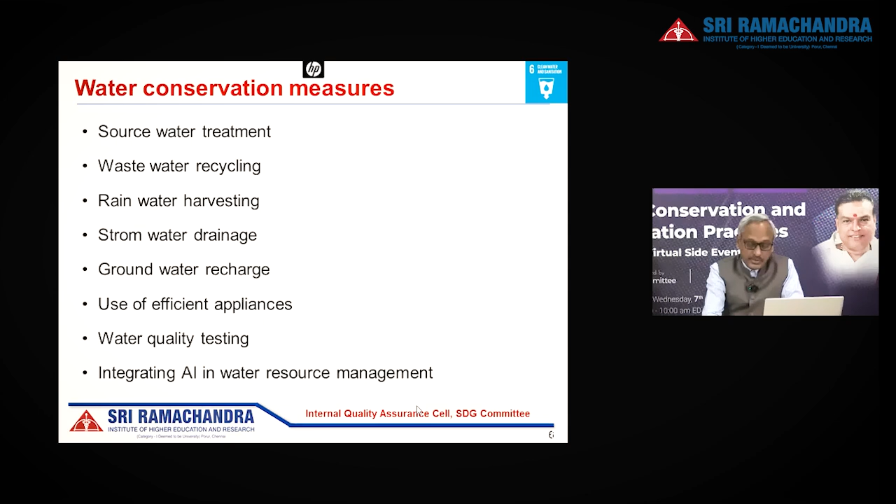On a given day, we are extracting 1,900 kiloliters per day of fresh water, but that's not the requirement of SRIHER. Our requirement is 4,300 kiloliters per day, which means that we are recycling around 45 to 50% of the water and using it back into the system. That's a very unique aspect.

So where is the water used? For domestic purposes, laboratory operations, toilet flushing, swimming pool, laundry, the HVAC system, and gardening. Every outlet is connected to a combined effluent treatment plant.

And the excess treated water is stored in the artificial pond. I want to mention here that...

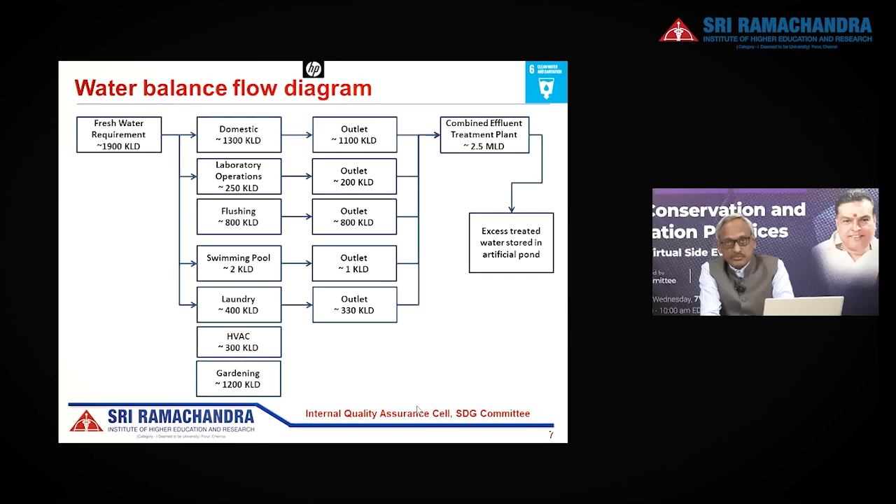With the different requirements of water treatment, we have obtained permission for having a combined effluent treatment plant. Normally you would need a separate sewage treatment plant and effluent treatment plant, but we at SRIHER have obtained permissions from the Tamil Nadu State Pollution Control Board to have a combined effluent treatment plant. So how do we treat the source water?

We take bore water, around 1,900 kiloliters, which first goes into a collection tank, and then we add specific chemicals to remove the iron. We have a specific challenge in our campus - the only problem we face is with iron - so we have an iron removal plant exclusively, followed by the iron removal system.

This water is then taken to the sand multi-graded filter, multi-graded stone and sand filters, and finally goes to the activated carbon adsorption system, followed by disinfection with 5% sodium hypochlorite. After that, it goes to the storage tank.

From there, it goes to the utility - around 1,290 kiloliters are taken for utility purposes. From that underground tank, a part goes to the softener plant, and a part goes to the laundry and dental colleges, and also to the sterile stores department.

We have an additional filtration system for various uses. After the utility, it goes to the RO plant stage 1, and the output of stage 1 goes for drinking, while the reject water is recirculated back to the utility purposes.

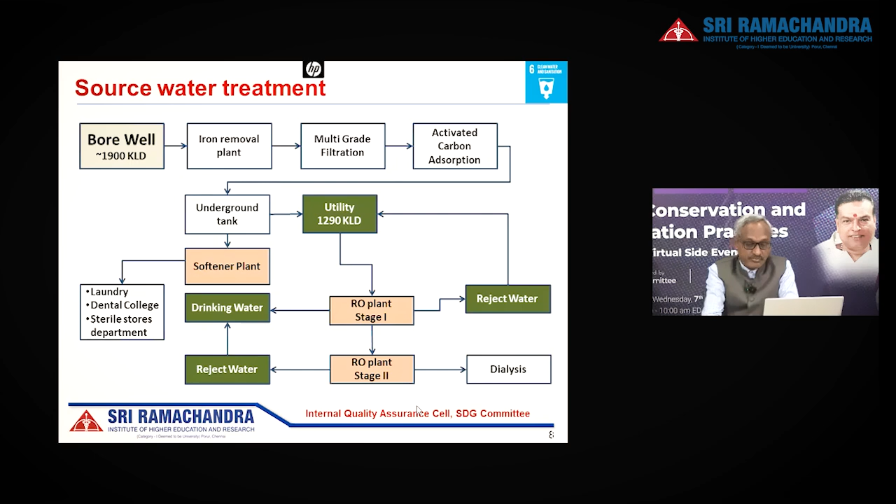This is the flow diagram showing how the water treatment plant operates in our campus. I'm not sure if you can see the raw water pump, which pumps out water from the bore well, into a collection tank.

On the right-hand side, there is an iron removal plant where we add polyionic chemicals and give aeration to convert the iron from the dissolved to the suspended state, so it can be flocculated and removed. This simple process has been done very efficiently for decades. Following iron removal from the clarifier system, it goes to the sand filter bed, then activated carbon, then UV treatment, and from there back to the RO system.

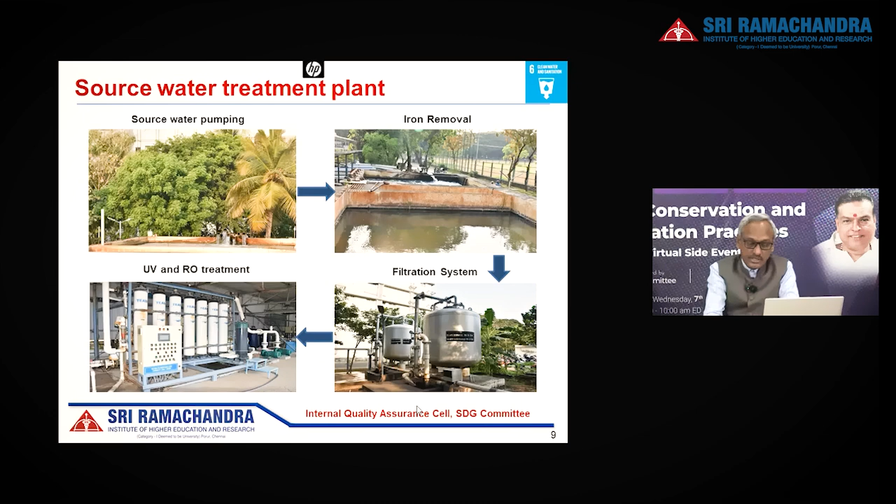We have 3 levels of aeration tank where the water is aerated, with biological oxidation by bacteria. After the aeration process, it goes to the clarifier where all the organic matters settle down and are collected. The sludges are collected and removed, and then the clear water goes to the sand filter bed and activated carbon filters.

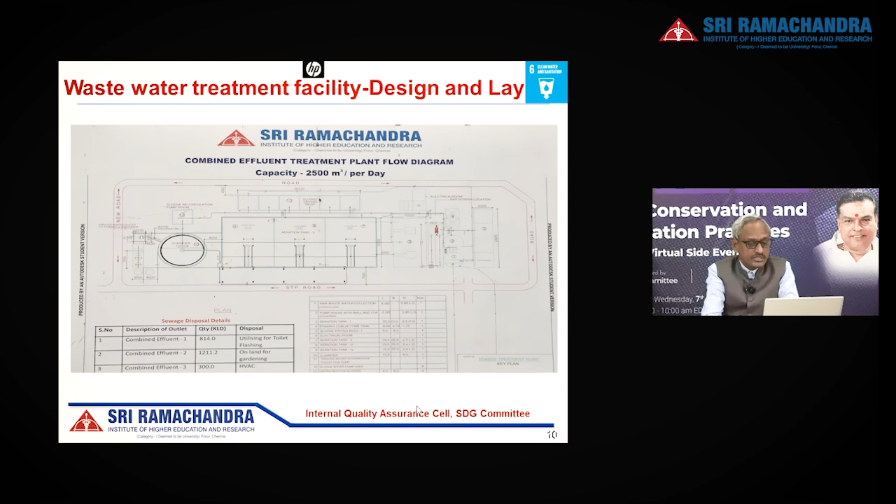Let me show some pictures of the plant operating in the campus. From the left-hand side is the collection tank, and moving right, it goes to primary aeration, secondary aeration, and tertiary aeration, then to the clarifier tank, the filtration system, UV treatment, and the softener plant.

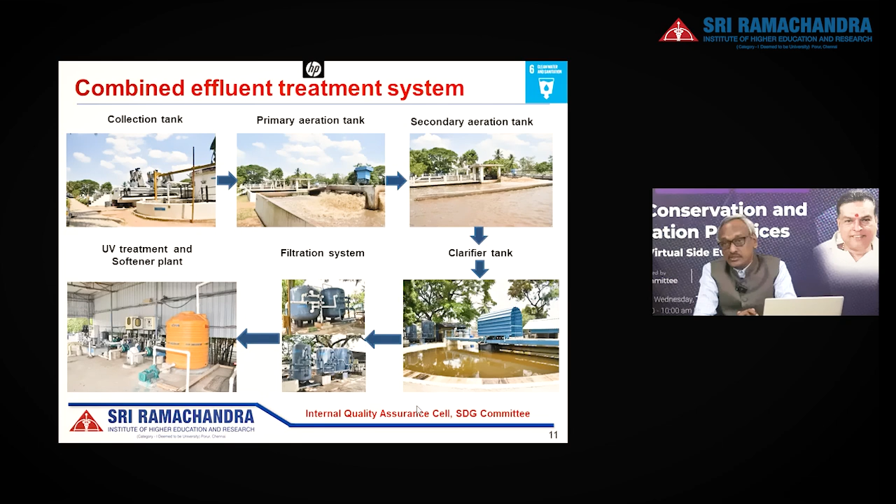So what happens after we treat this water? It's very unique - after storing it in the underground tank, it goes through UV treatment, and then to the next level where it is stored and taken for toilet flushing. Around 820 kiloliters per day is recycled back for toilet flushing.

Next stage is going for ultrafiltration. Why do we need ultrafiltration? Because, along with the softener plant, we use that water for the HVAC cooling water system, like heating, ventilation, and air conditioning. So uniquely, we cool the water and take the cool air to circulate in the air conditioning system.

This is another energy efficiency system we have been following in the campus for years. Additionally, condensate water coming out of the HVAC system, around 5,000 liters per day, we are expanding the system to other buildings. Currently, this condensate water is used for dishwashing purposes. It's another place where we don't want to waste water.

After the effluent is treated, the water goes directly into the artificial pond. This is a very unique artificial pond, 500 meters length, 70 meters width, and 3.5 meters depth. It has a very high holding capacity, and therefore for gardening, water is pumped from this artificial pond. Again, I want to reinstate that we are a zero discharge campus. Anywhere in the flow chart, whatever waste comes out of any process, we reuse and recycle it back into the process.

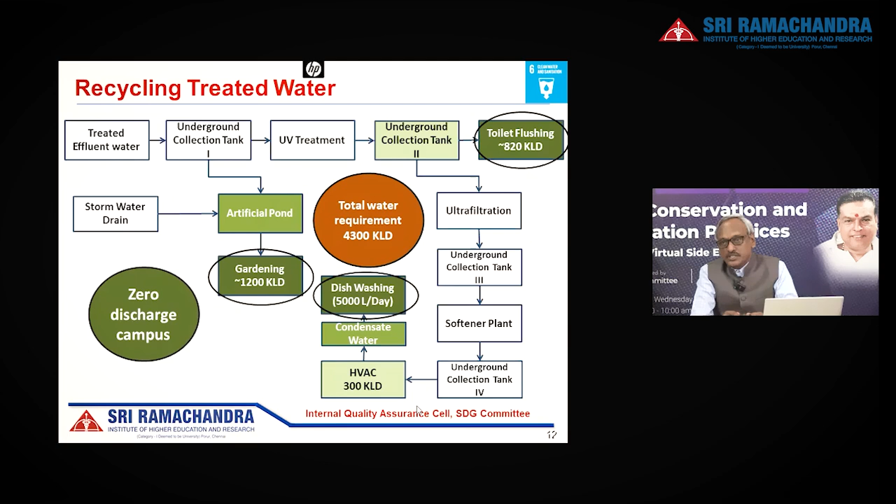So if you look at this, we are saving around 45 to 50% of the water by using the recycled water.

Rainwater harvesting: we have a good rainwater harvesting system spread over 150 acres of land. First, we have rooftop area. What do we do with it? We have around 100,000 square meters of rooftop area across our campus, from constituent colleges to hostels, hospitals, and residential buildings. So around 8,100 cubic meter harvesting capacity has been established from the rooftop area.

We have 9 open wells with a 2,145 cubic meter capacity, so we can harvest water there as well. We also have harvesting pits, 36 in number. We follow specific guidelines and standards for constructing these rainwater harvesting pits, and together they provide 122 cubic meters of harvesting capacity.

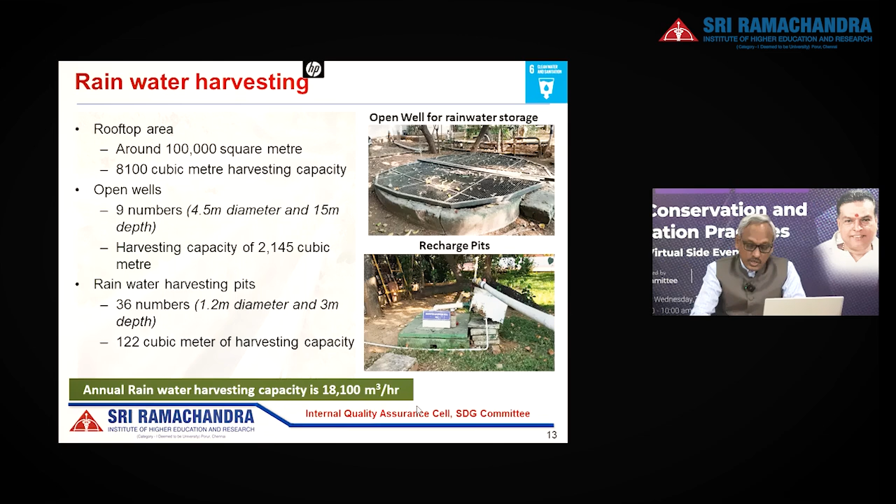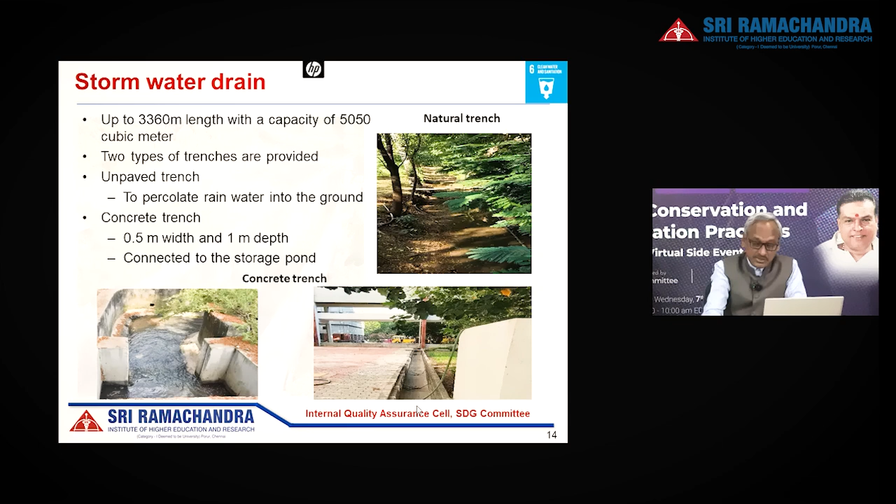So we have a mantra: catch the rain where it falls. This is not our own mantra, it's the mantra of the National Water Mission, whose campaign is to catch the rain where it falls. From this overview, you can understand that we have not wasted water anywhere, whether from rooftops, surface parking, green belts, or unpaved areas. Wherever water falls, we catch and percolate it, or it is collected in the artificial pond.

So what is very significant about this? When there is a water body, it attracts birds. We have more than 25 bird species within our campus, and it's a destination for migratory birds as well. Every space in this campus has water recharging potential, so we do not waste a liter of water.

We might talk about the direct benefits of water conservation, how much volume of water you save, but beyond that there are several co-benefits we never imagined. Importantly, the water stored from the artificial pond is used for irrigation and gardening purposes.

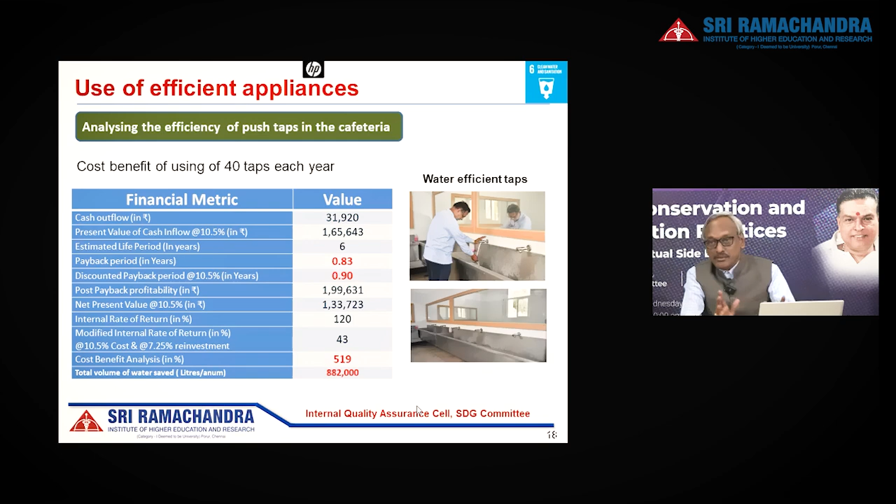Coming next, what are the water efficient appliances we use? Here's an example cost-benefit analysis of implementing 40 push-type taps in the cafeteria. The cash outflow is 31,920 rupees for 40 taps. The payback period is 9 months with simple payback calculation, and 11 months with interest-worked payback. For every rupee invested, we get about 5 rupees back, a 519% benefit from implementing push-type taps in the cafeteria. The total volume of water saved is around 882,000 liters per annum, just from these 40 taps.

We also have filter taps with an even more efficient tapping system. However, the cost benefit analysis is 10% in this case, with a payback period of 4 years, because usage is much less compared to the earlier case where usage is very high. The lesson here is that when usage and units are more, the cost efficiency and cost benefit are greater.

However, ignoring the cost, look at the volume of water saved per annum: it's 282,000 liters saved. It's not about the money, it's not about the economics, it's about how much water you save. That's our focus — every place we want to save some milliliters or liters of water.

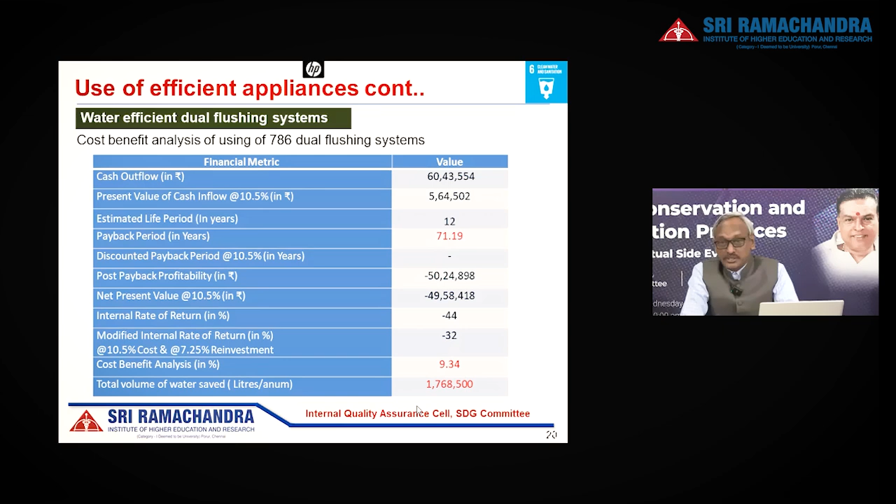We have implemented a dual flushing system; I'm giving a cost calculation for 786 dual flushing systems for urinals, saving 2.5 liters per use. Given that, we save around 17,68,500 liters per annum, which is quite significant. Even though there's no cost benefit in this case, we are happy saving 17,68,500 liters of water per annum.

Not limited to that, we have now successfully implemented a water efficient pumping system — variable flow drive pumps. What does that mean?

These pumps, we have 3 pumps. These 3 pumps operate at full capacity based on the demand. If the demand is less, one pump will be operated. If the demand is moderate, 2 pumps will automatically operate. And if the demand is more, all the pumps will operate. That is the ultimate thing in this process.

So what do we save in this? We save around 25,600 units of electricity savings per annum. This is a very significant amount with just 3 pumps.

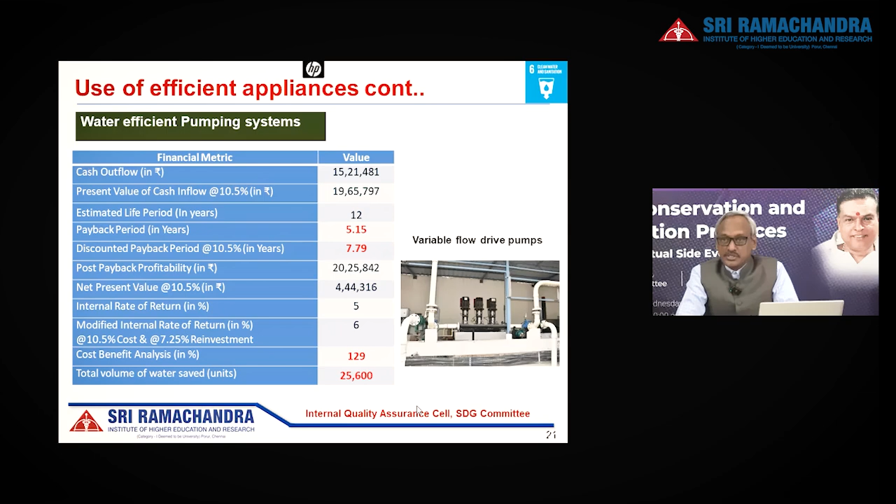What are the other advantages of implementing these variable flow drive pumps? You don't need an overhead tank. You don't need to construct an overhead tank. You don't need maintenance in this process. You don't need to involve human resources for maintenance. And therefore, you have more advantage of using this device.

Yes, of course, without meeting the standards and guidelines, we cannot operate such a huge campus, right? We are governed by the Water Act, and we are monitored by the State Pollution Control Board, and we meet all kinds of standards in terms of all the parameters. We follow the Indian Standard 10,500 for all the water quality standards.

So how do we test? What is the testing frequency? For the source water, we test once in a quarter. Treated water, we test daily because it's going for utility and various purposes. And RO water is also tested daily. It goes for drinking and dialysis. So we have stringent norms of monitoring the water.

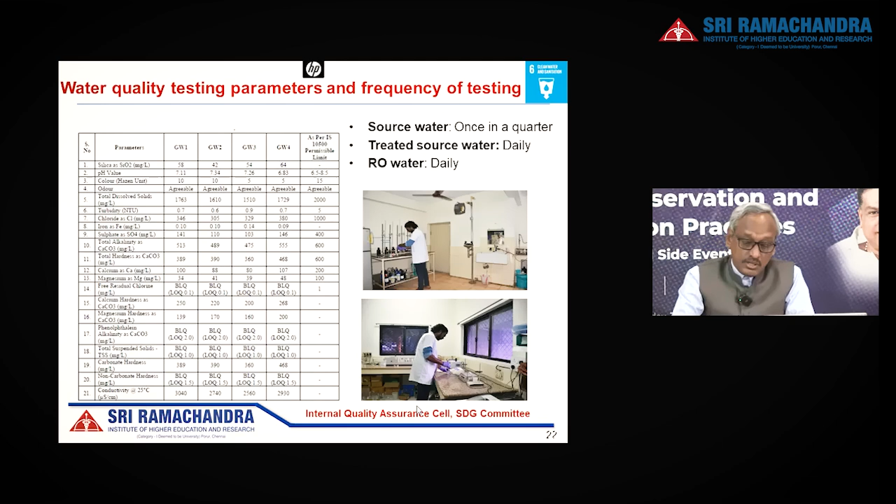Yeah, we are collecting a lot of data. We are having so much information. What do we do with this? It's quite simple now today with the availability of AI and machine learning tools.

As I mentioned, we have engineering. For the cost benefit analysis, we were taking the expertise from the Faculty of Management Sciences. We have taken the expertise of Sri Ramachandra Engineering and Technology for providing the AI and machine learning tools for forecasting and predicting the water use.

So what are the 3 objectives? At the first stage, we want to look at what is the water usage over time. So we took 3 years of data and analyzed it, which I will be presenting shortly.

And secondly, we want to use the AI and machine learning process to efficiently manage the water filtration systems. And third, we want to forecast the water demand and also the filter changing mechanism, because once the filters are overloaded, at what frequency, at what time stamp we have to change the filter.

So we have employed these AI and ML tools for integrating this into the data and ongoing data collection efforts. And also we want to make use of these tools for efficient resource management in all aspects.

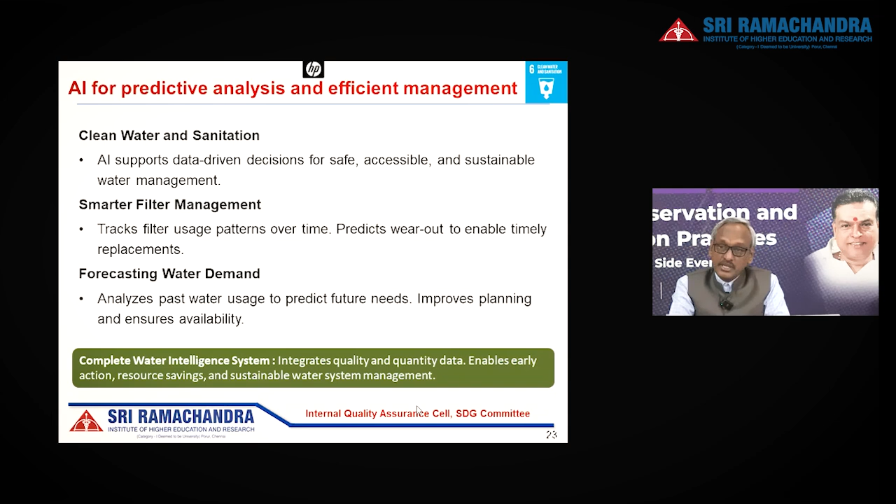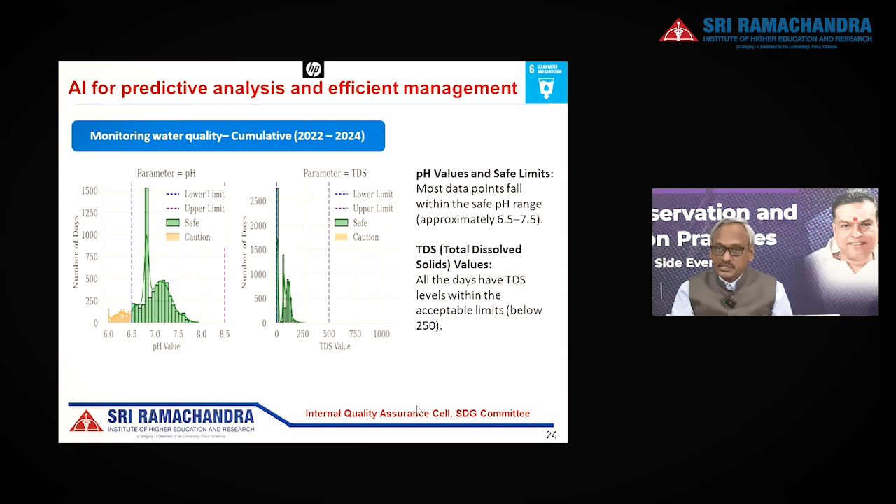And even within the TDS or TSS, we see that at any given time, all the water quality parameters are kept below the standards. This is a very unique thing, and thankful to the water department for efficiently managing this at a given operations at multiple locations.

So what do we do? On the predictive analysis, we want to analyze the different filter beds. We have 5 filter beds, filter storage filtering systems, and we looked at the data over the 3 years. If you look at that, all the filtration systems have been used differently, in different volumes. So if you look at this, different filters have been used at different volumes, and we found that at least one filter we have underutilized.

One other thing we have to be very careful about is that if any water system fails, we should have a backup system to meet the demand. So we have one as a backup, and we are running it at a lower operation so that at least the system is efficiently working. But what about the other 4?

The other 4 filtration systems are used in a different way, so we also analyze the data on a quarterly basis. And by analyzing data on the quarterly basis, we come to know what is the peak demand period in our campus. We found that June, July, and August is a period where we see peak demand within the campus.

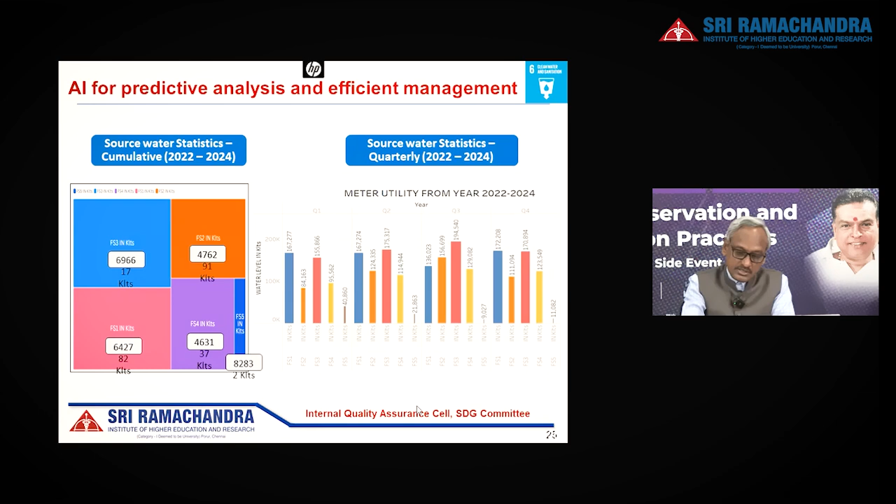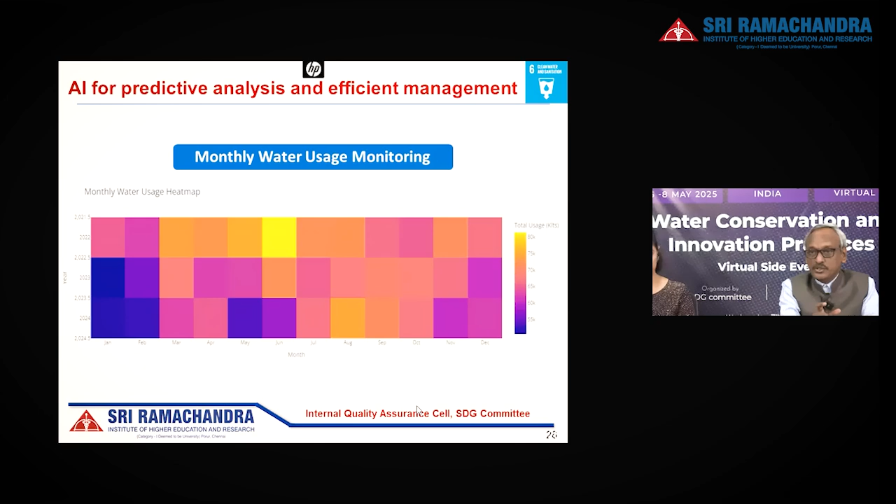So this is 3-year data, and AI and machine learning can be a powerful tool for monitoring water systems, and then you can manipulate how you want to optimize the resources that are available.

So I see that for the next 2 years, the water trend will be the same, but with lower consumption of water, because probably we might be using more water conservation measures. That is what we are anticipating.

What is the next thing we want to use this tool for? There are various critical parameters used for changing the filtering system, like iron, one of the major things. So we want to use various essential parameters like pH, total suspended solids, turbidity, and iron, and have a multi-parameter model to forecast at what given time we need to change the filter.

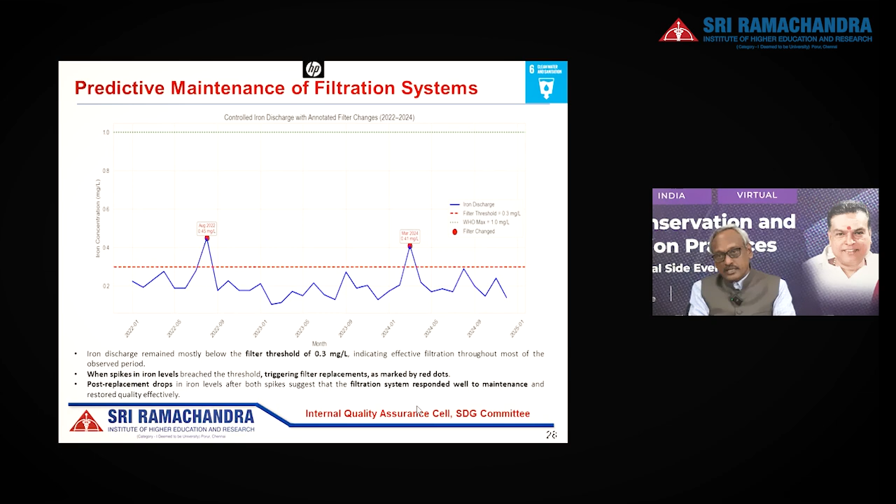To summarize, I think water efficient management is pivotal for a sustainable management system. It's a very challenging operation today for our campus because we are in the heart of the city. Buildings inside and outside the campus, multi-story buildings or habitations around the campus, might extract groundwater.

So what are we planning for the future? How do we model the water requirements for the next 20 or 30 years using this AI and machine learning tool, based on rainwater, groundwater table, and other water quality parameters? There is a low-hanging fruit here, based on the hydrogeology and other parameters.

We will be integrating automation in monitoring the water usage and water quality, which will extend a greater opportunity for us to efficiently manage water resources for the next 20 to 30 years. One good news for us is that the 10-year trend analysis of previous data says that the water table has increased by an average of around 4.4 meters in Chennai city and Kanchipuram, roughly. So probably we are getting more rain and more flood, and of course we have to have an efficient system of management.

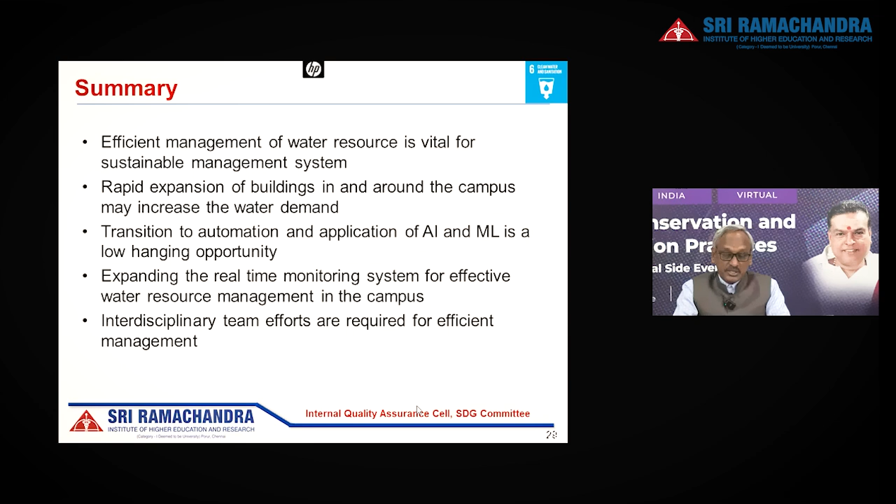So the real-time monitoring system is very much essential for us to move this AI and machine learning technology efficiently. And as I said, this is an interdisciplinary team effort, because I cannot do this on my own. I have to depend on various expertise.

So at least I have to depend on the infrastructure team. There's a team that is working, it's not a one person or a one member team who are working on these initiatives. I would extend my acknowledgement to Dr. Ravi, Senior Coordinator, who has been encouraging us and behind us to get the data and do it in a quality way.

And the IQAC is continuously monitoring. It's not like a 1 year or 6 month interval. They are continuously monitoring the good practices that have been followed and documenting that, so that we are able to share with the external world, so that this kind of experience can be learned, or either way, we are also happy to learn from others to better manage the water efficiently.

I would like to thank Dr. Thamasselvan, the chairman of the SDG committee, who have been working hard to organize this program, and their team as well, and Mr. Viraya Subramaniam, the general manager infrastructure. So his team has to cooperate providing the data.

Yes, of course, Dr. Selvam Jesaya, principal of Faculty of Management Sciences, and also his team, Dr. K. Sridharan, head of Department of Laboratory Medicine, and also Dr. Raghunath and team from Sri Ramachandra Engineering Technology for providing their expertise to use the data and inform better water resource management. Thank you all very much for your attention, and thank you once again.

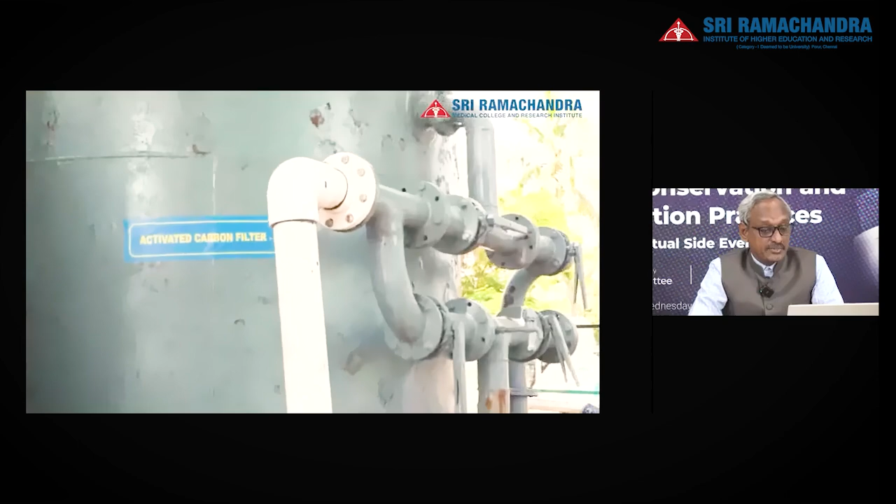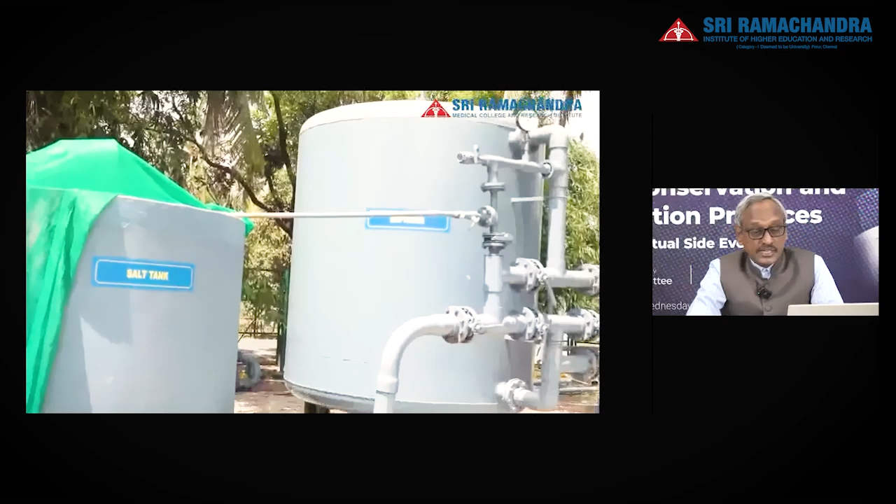And from the clarifier system, the water overflows and is taken to the multi-grade sand filtration system, followed by the activated carbon filter. After the outlet of the activated carbon filter, we again treat with 5% hypochlorite solution, because even after that, sometimes the efficiency of the system will be lost, so we want to efficiently disinfect the water.

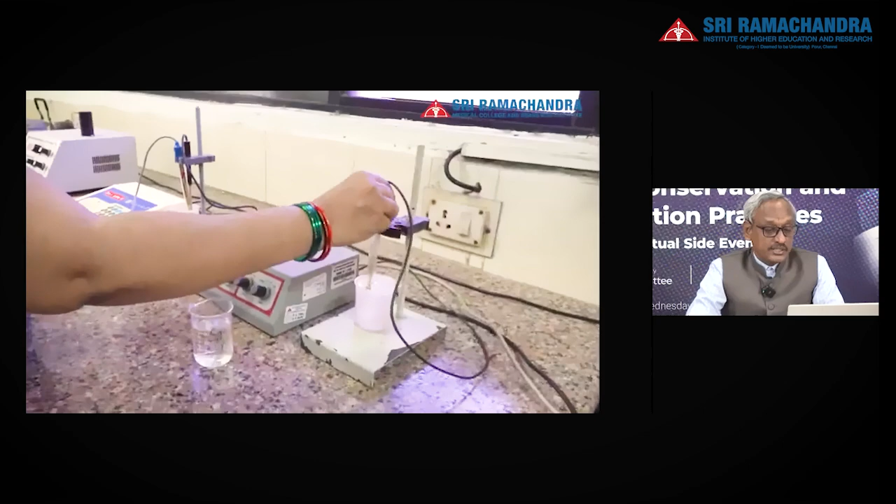So here is the RO plant we are looking at. There are different locations where RO plants are placed depending on accessibility. Every water sample from the RO and the treated water is tested for prescribed water quality parameters, and we are entering those data sets. As I said, now we are integrating AI into the data collection system so that we will have an effective forecast of water quality and water use for this particular area.

Yes, the AI team from our engineering team has validated that. Probably we will share the SOPs soon. Thank you for raising this question, because these are very innovative practices that we are following. Definitely we will be putting up the SOP on our website so that it can be used by other institutions as well. So we are happy to share that. Please wait for a moment, and over time you can look at our university website. We will be sharing this process soon.